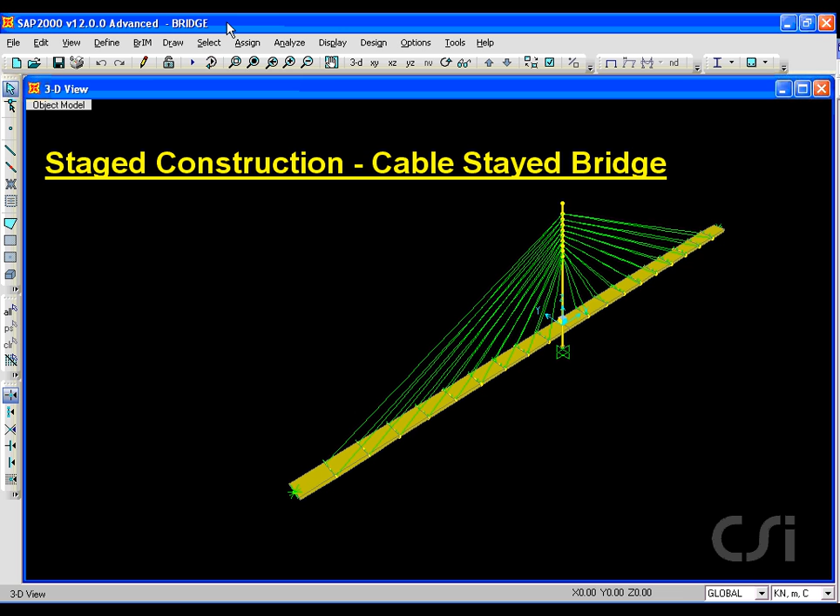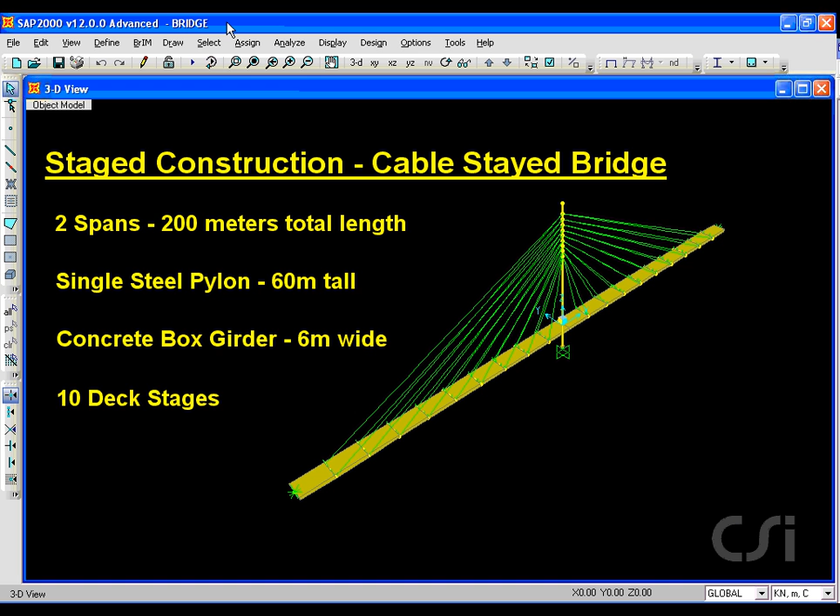This tutorial will show how to use SAP 2000 to model staged construction of a cable-stayed bridge using the Construction Scheduler feature. It will have two spans, each 100 meters in length, with a single steel pylon 60 meters tall. The deck will be a concrete box section, 6 meters wide, and will be constructed in 10 stages.

We start the process by clicking on File, New Model, and selecting the units as kilonewton meters. We will construct the model using only grids, so click on the Grid Only button.

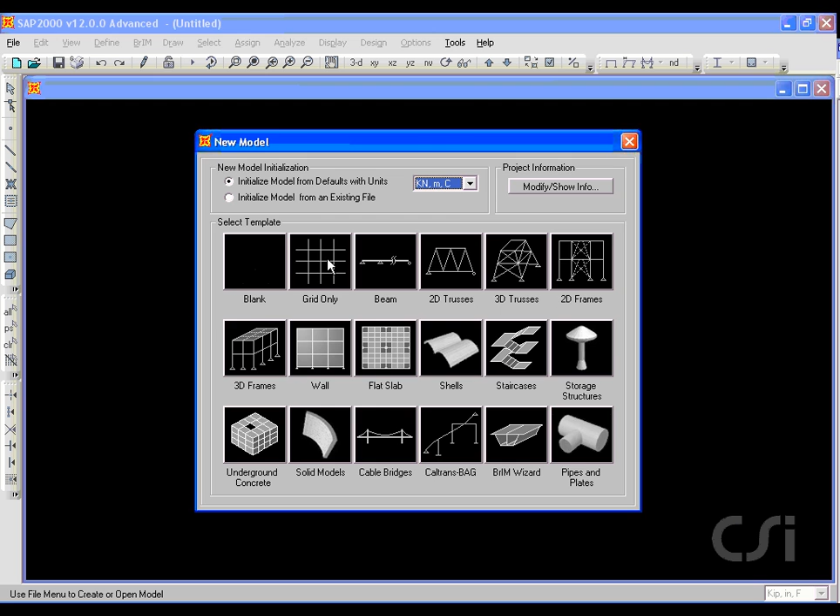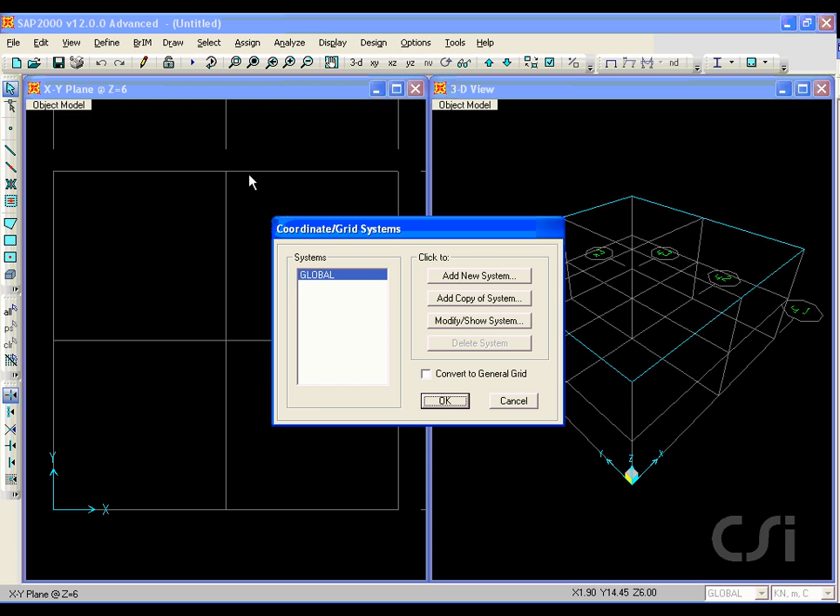We will have a total of 3 grid lines in each direction. Click on the Define Coordinate Systems Grids command, and then the Modify Show button to bring up the Define Grid System data form. For the X direction, which is along the span, our coordinates will be -100, 0, and +100. In the Y direction, which is across the deck width, we will enter -3, 3, and 0. In the Z direction, which is vertical, we enter -10, 0, and 50.

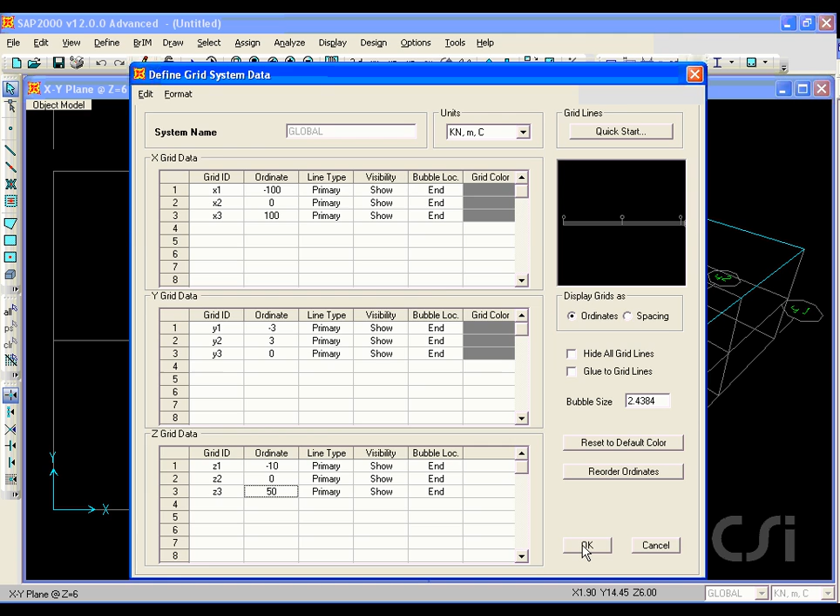We will work in only one window, so close the Plan window and then go to the Define Section Properties Frame Sections command. Here we will add pipe sections to define a non-prismatic pylon. Make sure that the frame section property type is set to steel and click the Pipe button.

We start with the bottom section and enter 1.2 meters for the diameter and 0.05 for the thickness.

We will add another pipe section to model the pylon at the top. Here it has a diameter of 0.6 meters and then again a thickness of 0.05.

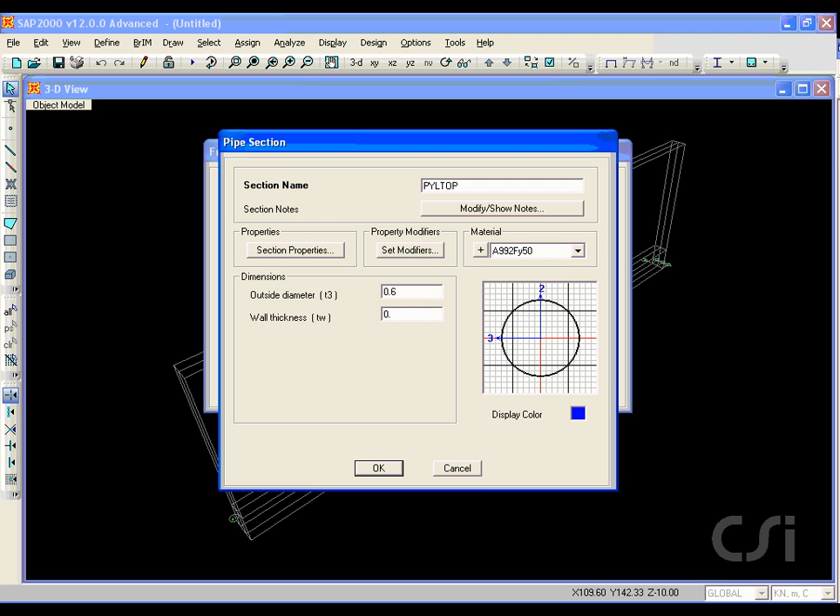Next, we take the previously defined sections and create a non-prismatic section. Select Other from the frame section property type and click the non-prismatic button.

We will call it Pylon, and use the top section as the start section and the bottom section as the end. It will be varied over the entire length in a cubic variation.

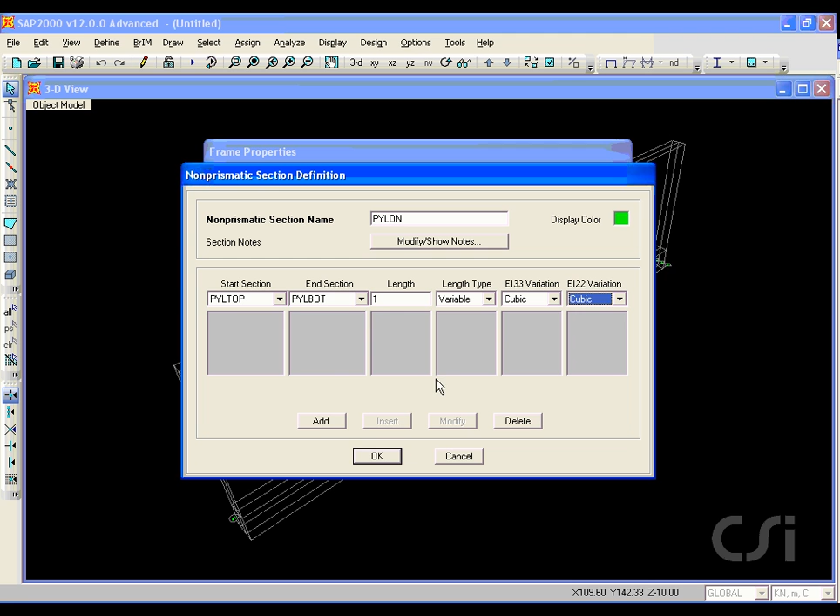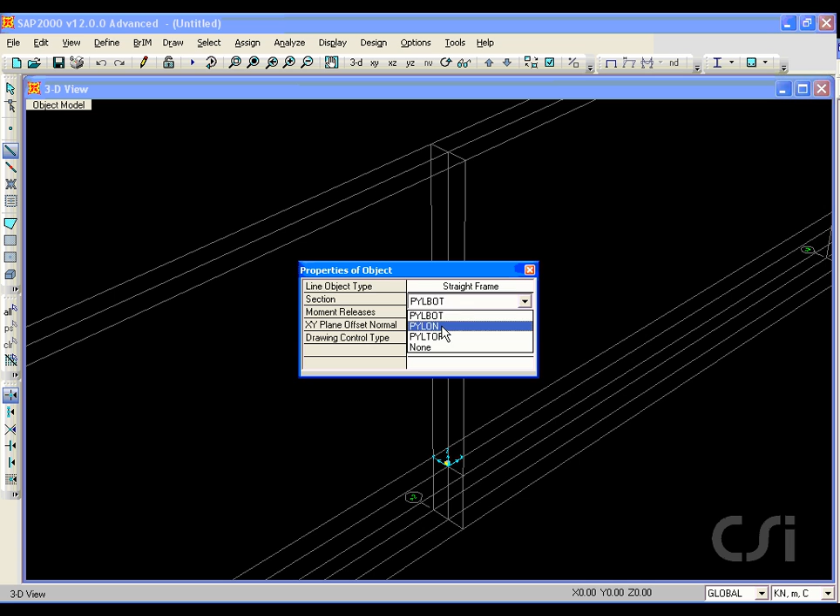Next, we zoom in on the pylon location and draw the pylon object, starting at the top and going to the bottom to match our member definition.

We leave the Draw mode and shut off the grids under the View menu.

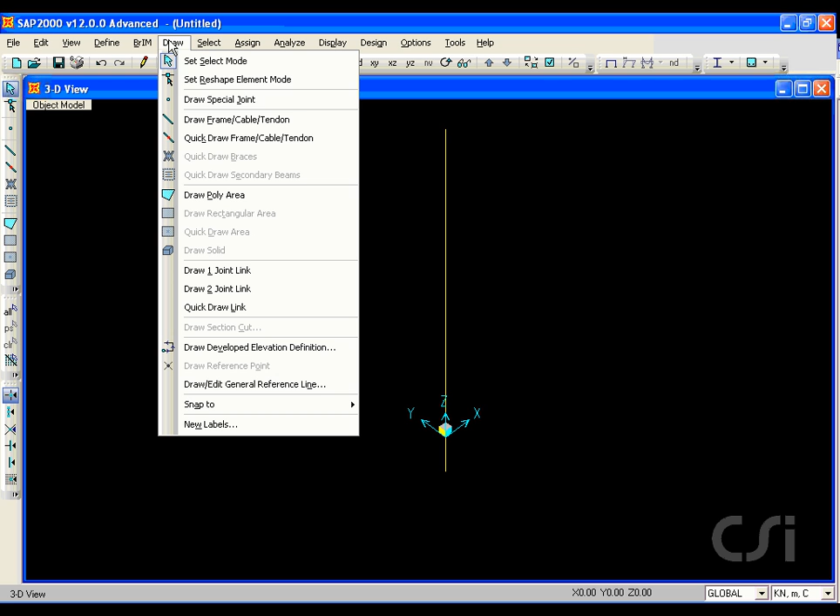Next, we will draw joints to model the saddle locations for the cables. The first joint will be 4 meters below the top of the pylon. By clicking on the top of the pylon with the offset set to -4 meters, a joint is added.

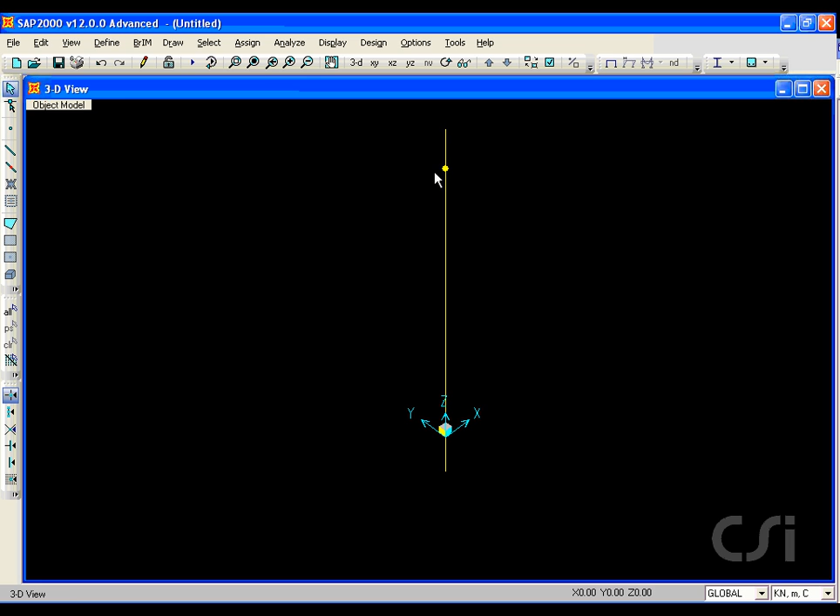We leave the Draw menu, select the joint just drawn, and go to the Edit Replicate command. Here, we will add additional joints for the saddles at 2-meter intervals below the selected joint. This gives us a total of 9 cable to pylon connections.

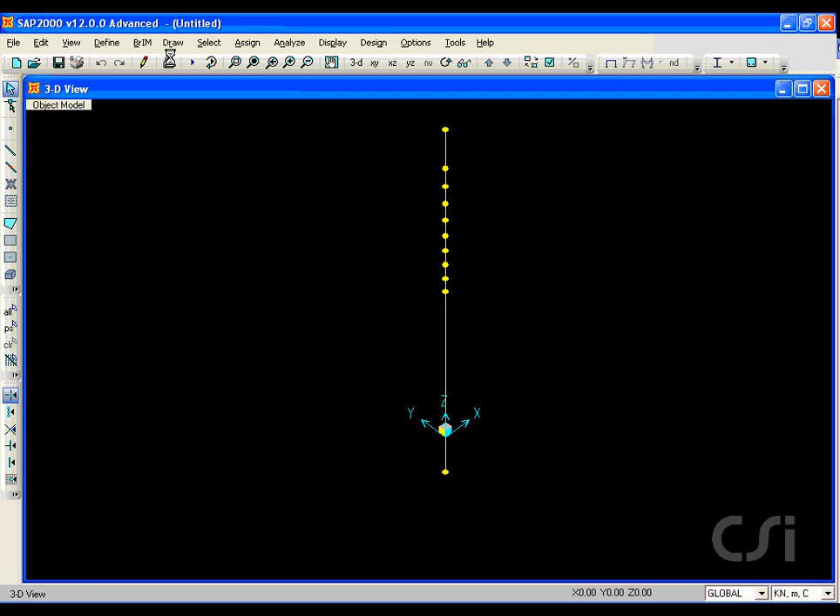Next, we will modify the concrete material property to include time-dependent properties. Make sure that 4000 psi is selected, which is our concrete material, and click the Modify Show button. Check the Switch to Advanced Property display box, and then the Modify Show Material Properties button.

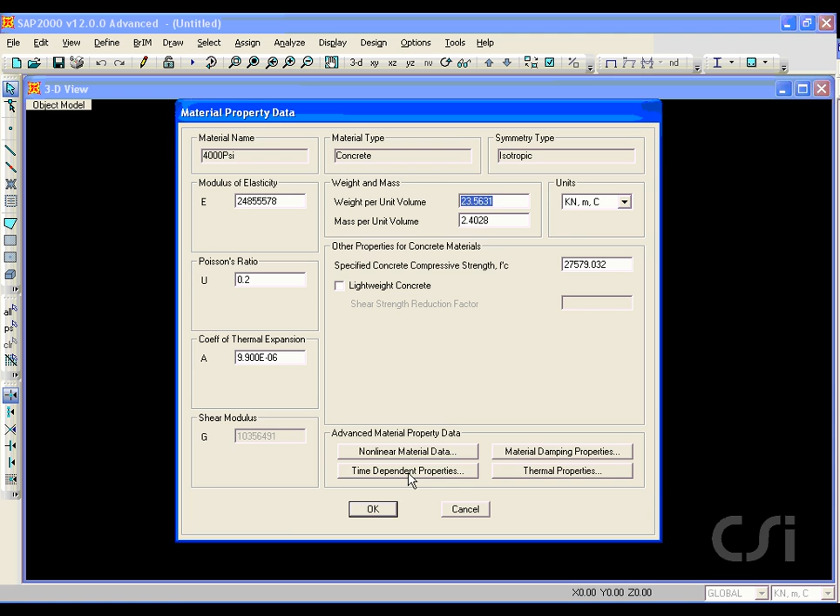Lastly, click the Time-Dependent Properties button. In this model, we will include both creep and shrinkage effects. We will set the shrinkage start age to be 3 days, and we'll use the full integration creep analysis type.

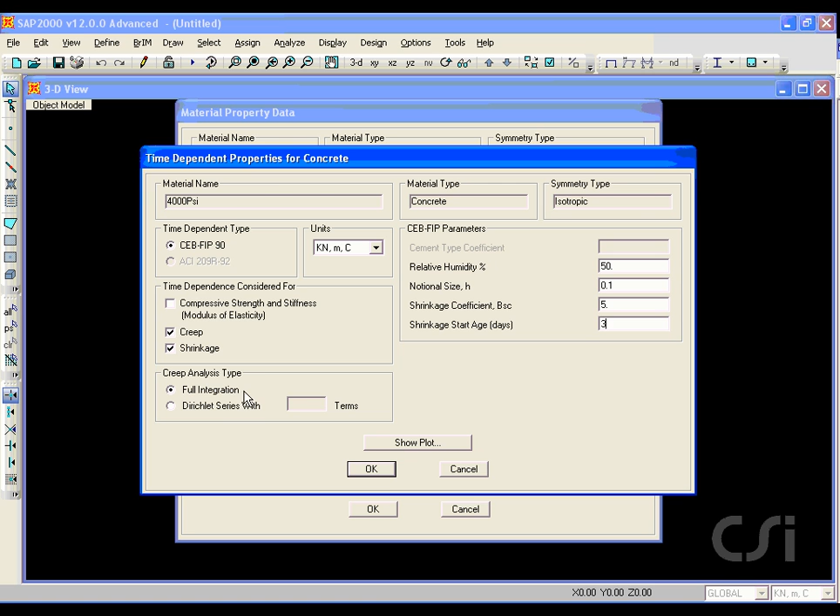Next, we will define the concrete box girder to be used for the deck. Select the material to be concrete and click on the Tube button.

Input a depth of 1.2 meters, a width of 6 meters, a flange thickness of 0.2, and a web thickness of 0.3.

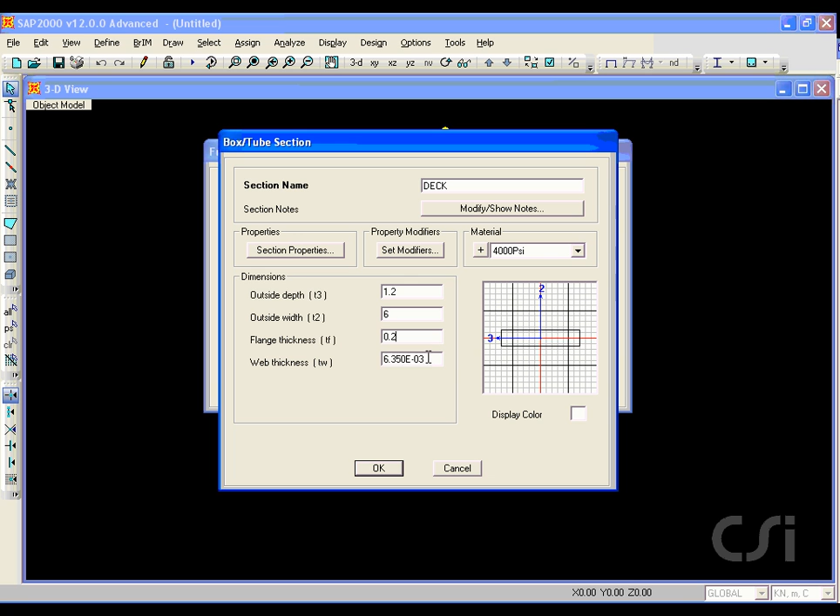Toggle the grids back on and switch to an XY plan view, and toggle down to the Z equals 0 level, which is the elevation of the deck. We will draw the deck as a single object from the pylon out to the right end.

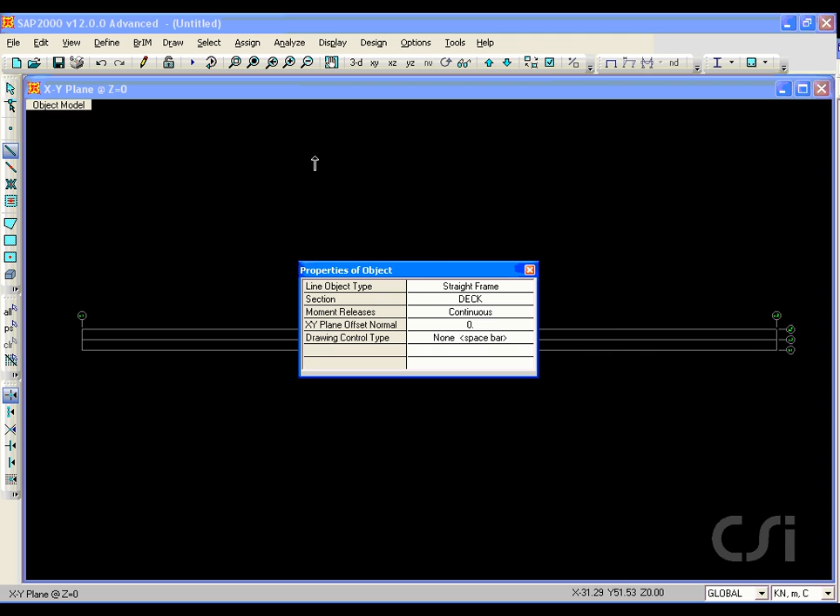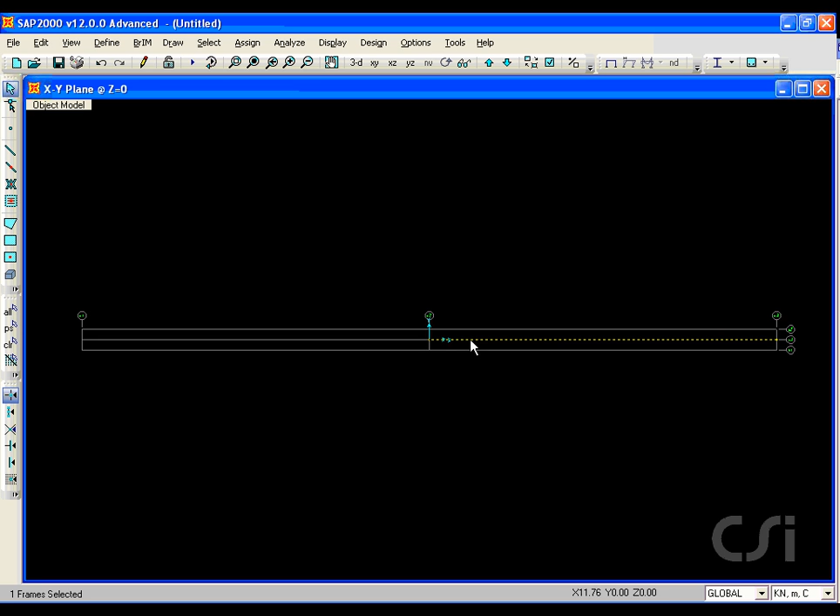Click on the Select Mode button and select the frame object just drawn. Go to the Edit, Edit Lines, Divide Frames command and enter 10 to divide the deck into 10 segments.

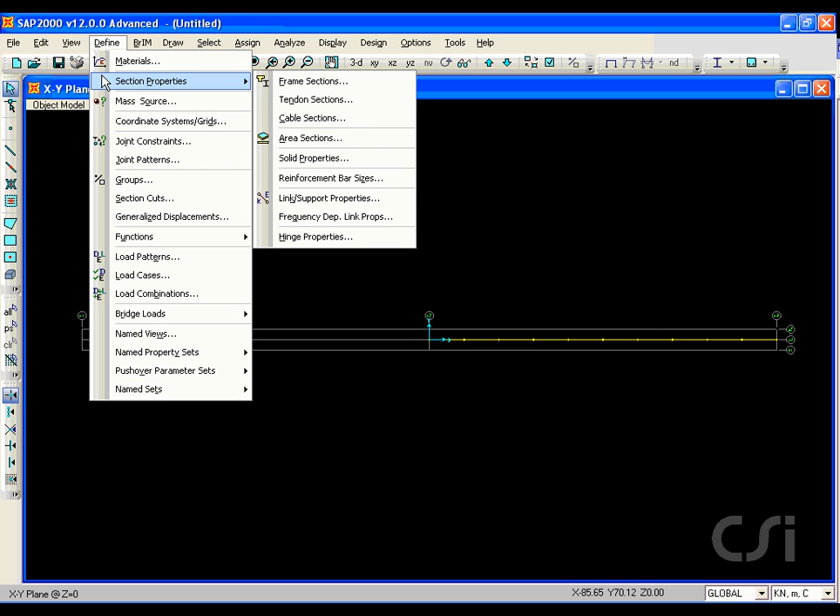Next, we will define rigid links that span from the deck centerline to the deck edge where the cables connect. Click on the Fix All button to restrict any relative deformation.

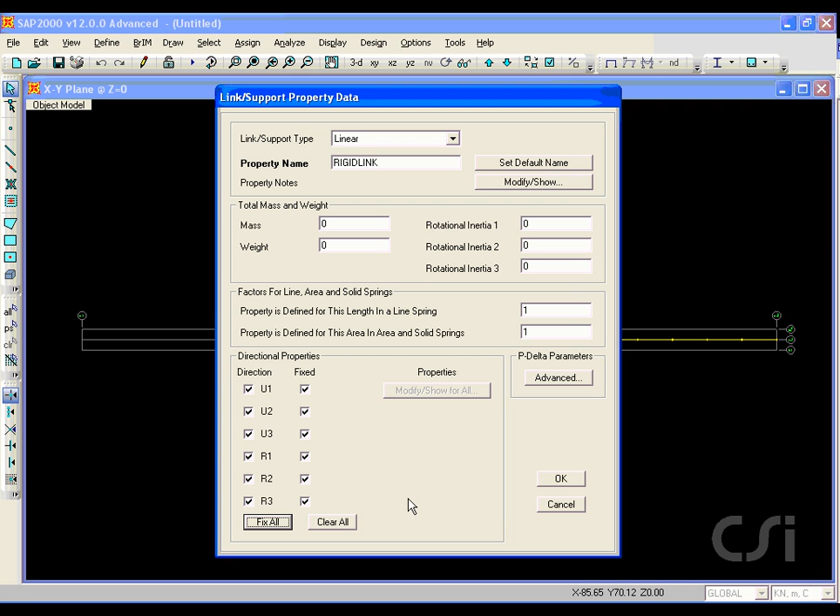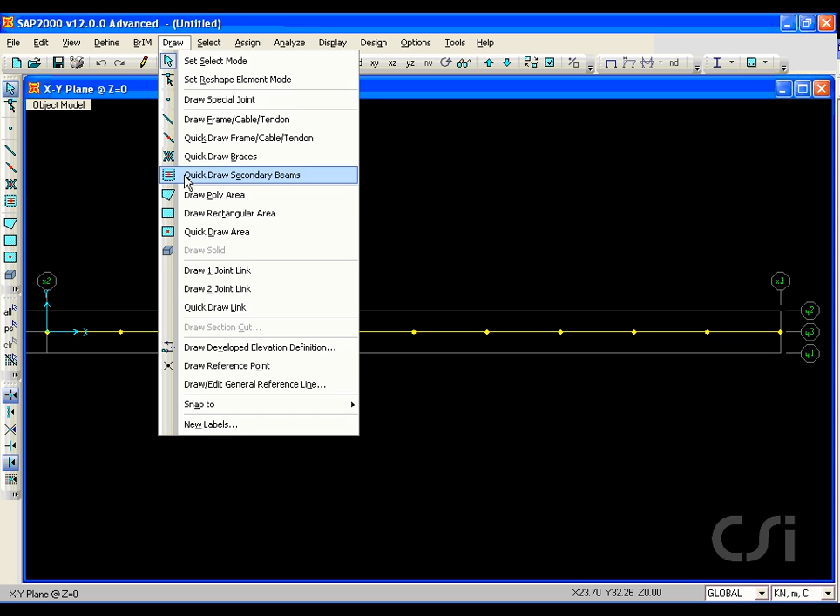Before we draw the links, we will turn on the Snap to Lines option, and we'll window in for a better view. Click on the Draw 2 Joint Link command, and make sure that rigid link is showing in the property box.

Click on the first joint to the right of the origin, select Vertical from the Drawing Control box, and click on the top grid line to draw one link. Right-click the mouse to stop drawing, and repeat the process for the rigid link on the other side of the deck.

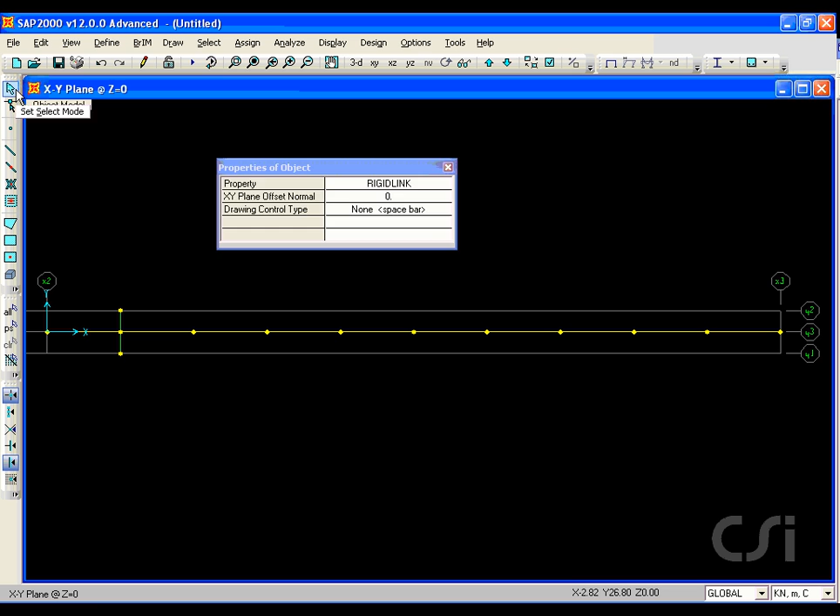Zoom in even closer and select the two rigid links just drawn and go to the Edit Replicate command, and add links at 10 meters on center.

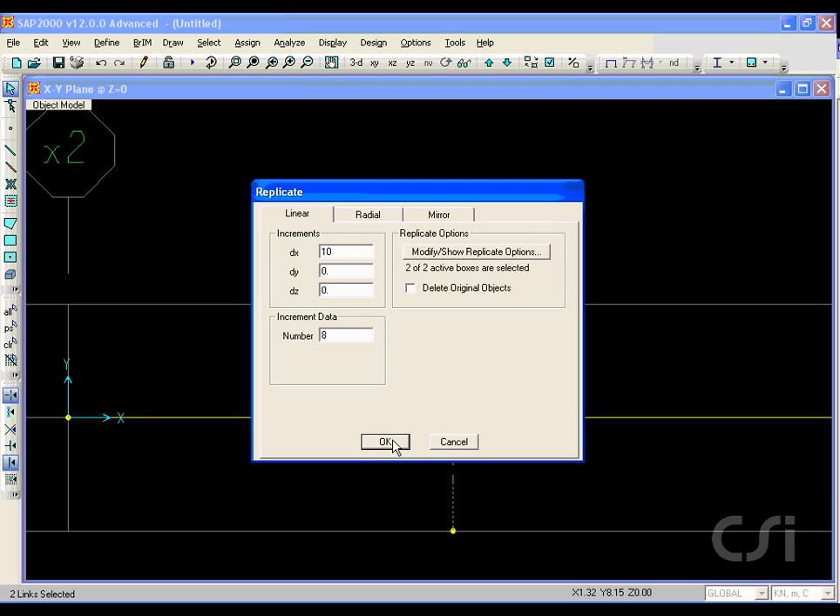Isolating our view on the right side of the bridge.

Next, we will define the cable sections. Go to Define Cable Sections and add a new section. We will define the properties using a diameter of 0.04 meters.

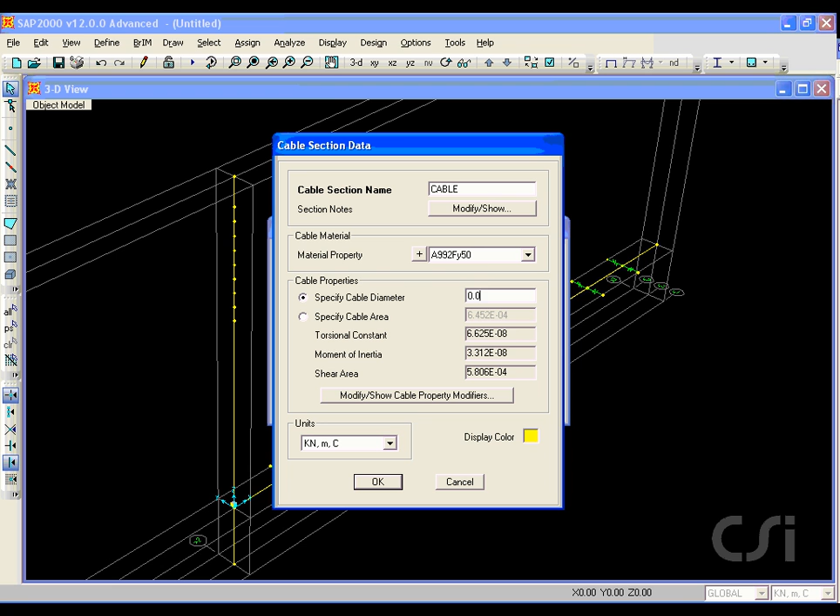Next, we will draw the cable objects. Make sure that the line object type and section are set to cable.

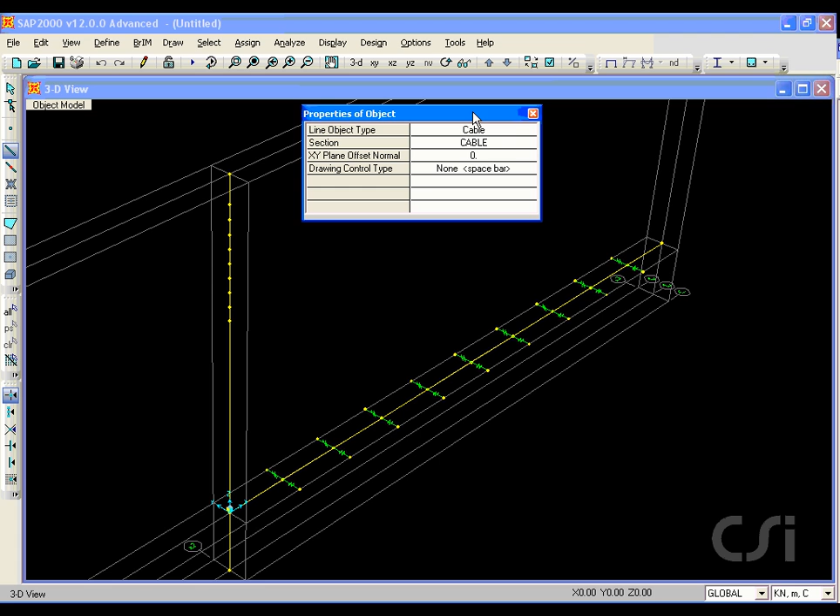Draw the cable from the lowest saddle point to the end of the first bridge segment. The cable geometry form automatically opens. Verify that the number of segments is set to 1, which is typically all we need due to the fact that catenary effects are automatically included in the cable, and make sure that the cable type is set to undeformed, as we want the cables to be taut.

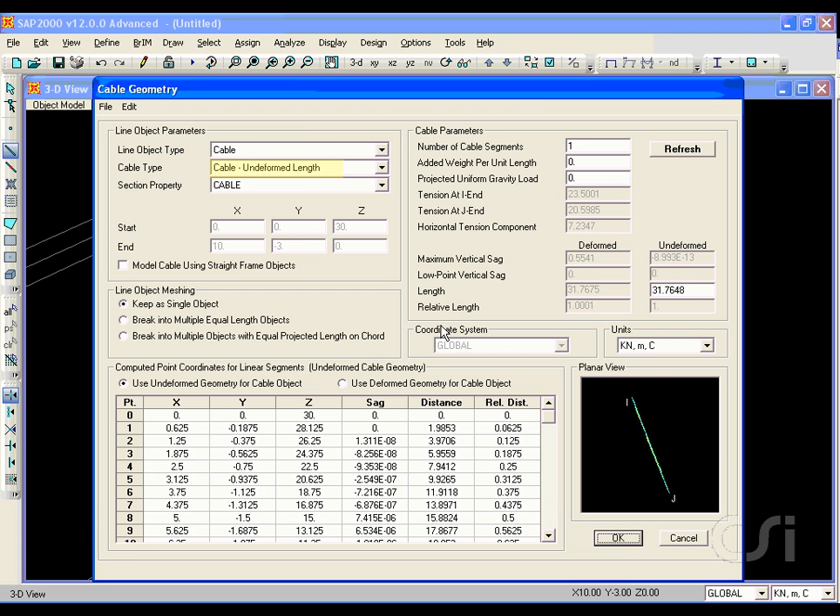Repeat the process for the next cable, going up 1 saddle point and out 1 bridge segment. Continue this drawing until cables have been added all the way out.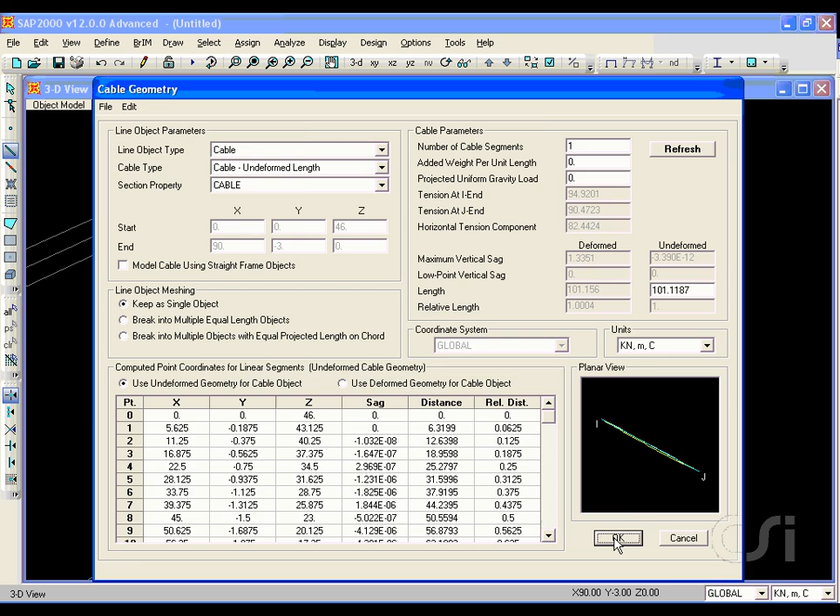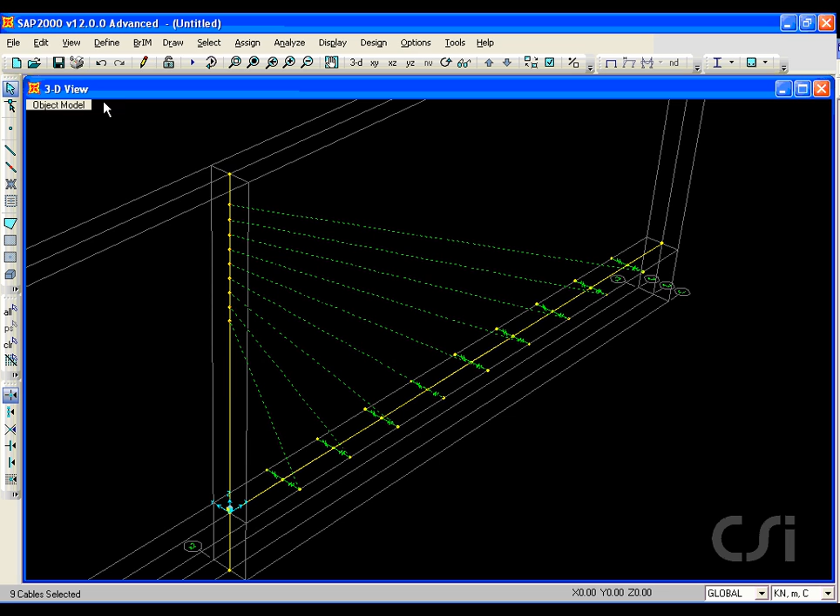Select all the cables using the Select Properties Cable Properties command, and go to the Edit Replicate command.

We will use the Mirror tab and mirror the cables about the plane parallel to X to create cables on the other side of the deck.

Now select the entire model and click on the pylon to unselect it. Again, click on the Edit Replicate command and then the Mirror tab.

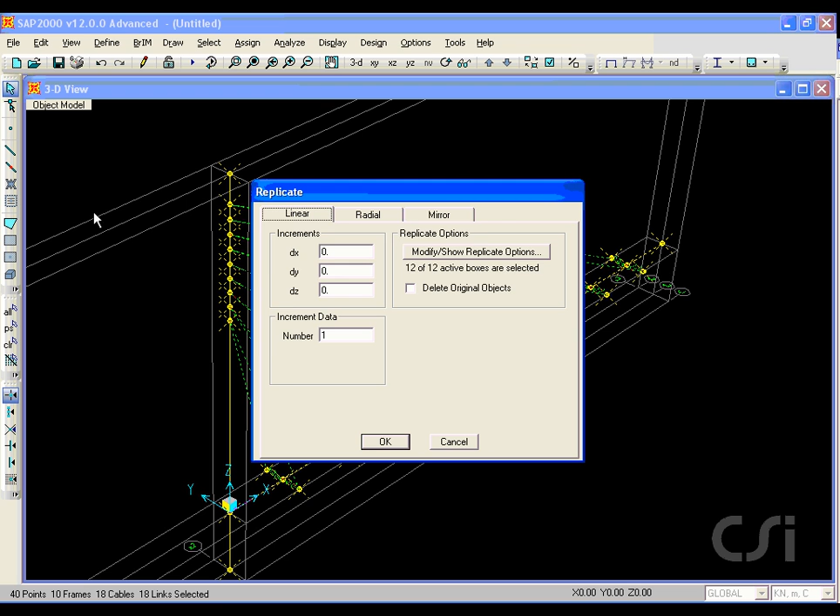But this time, click on the mirror about plane parallel to Y. This will replicate the cables and deck on the left side span.

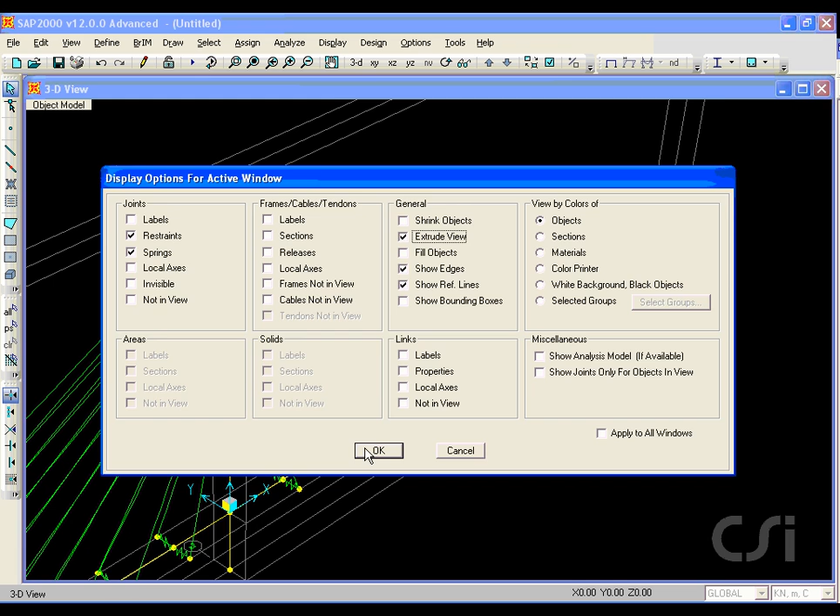To enhance the view, we will select the Extrude View option. And we will also turn off the grid lines and display the model in full 3D.

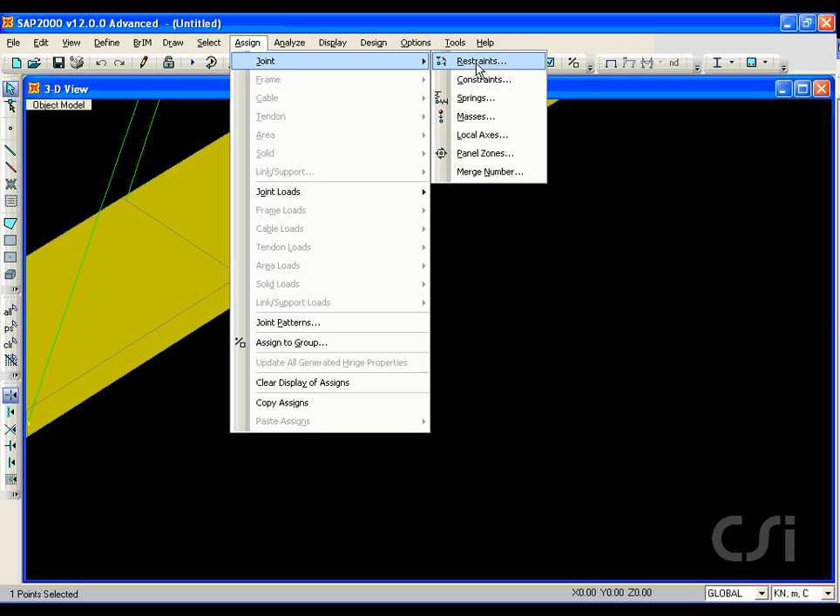Next, zoom into the base of the pylon so that we may assign support restraints. For the pylon, we will fix the base to restrict all translation and rotation.

We will turn off the extruded view so that it will be easier to select objects.

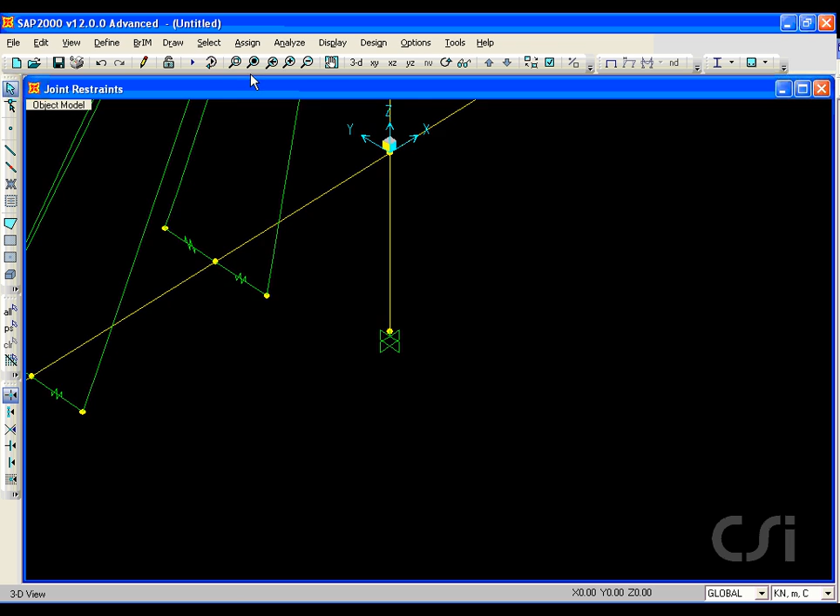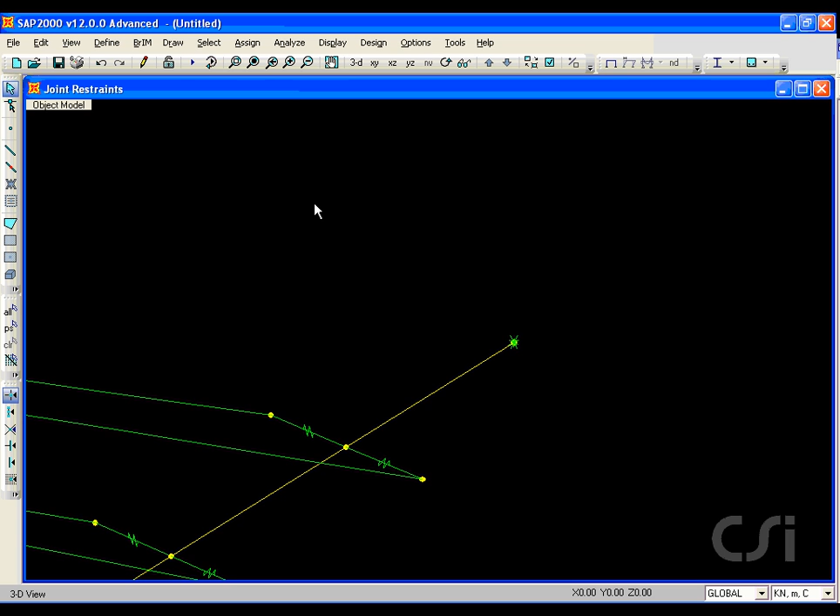Next, we will select the right end of the bridge and assign a roller support. We will assign the same roller support to the left end as well.

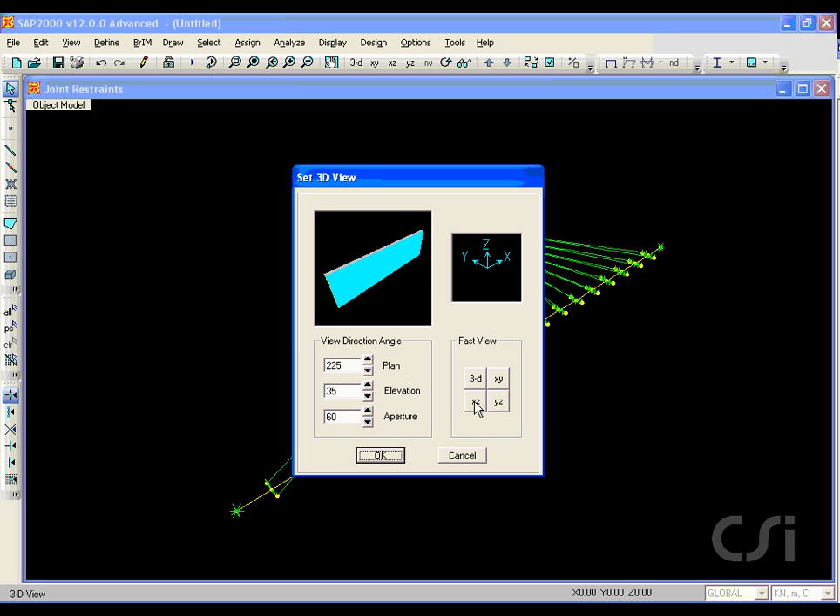Next, we will assign objects to groups that will be needed to define the stage construction. Start by switching the view to a XZ plane and selecting the pylon.

Go to the Assign to Group command and add a new group called Pylon.

Next, select the deck segments just to the right and left sides of the pylon, along with the accompanying cables. There will be 4 cables in all, and assign them to a group called Deck 1.

This will be the first deck construction stage. Repeat this procedure for the next group of decks and cables.

And continue until all deck sections have been assigned to a group, finishing up with group Deck 10 that consists of just deck.

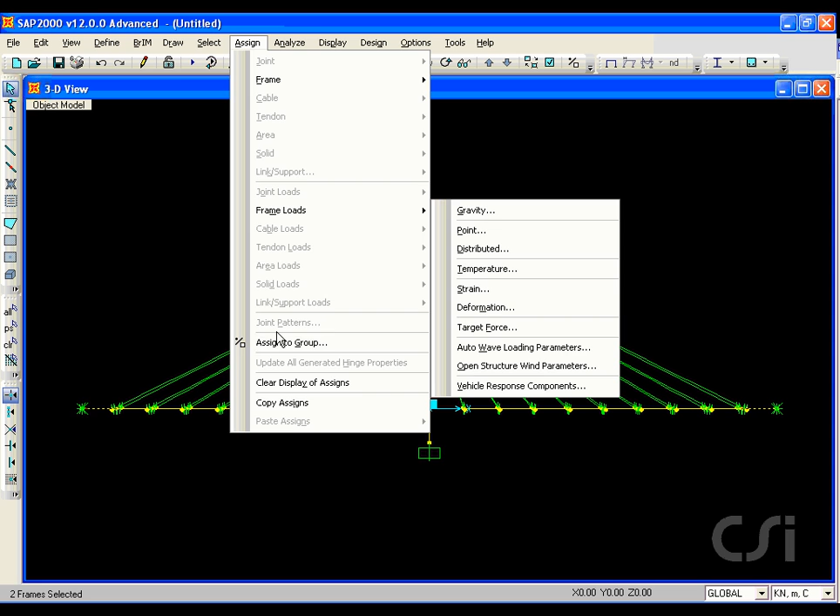The next step is to define the sequence of construction, which is where we will identify the tasks using the construction scheduler found under the BrIM menu.

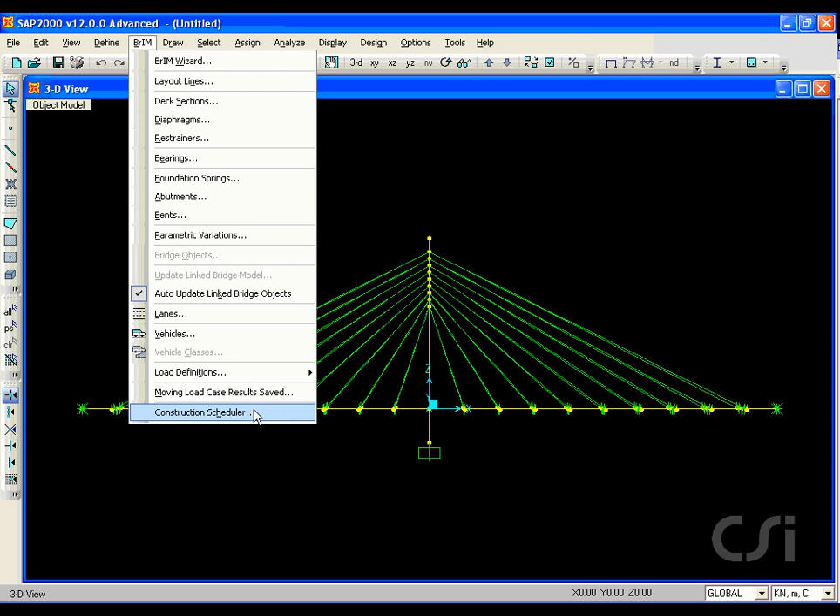Items input here will be converted into stages and cases under the Load Cases command. Stages may involve changes in the structure, application of load, and/or elapsed time during which creep, shrinkage, and material aging may occur. First, the model is saved.

Next, click the Add New Schedule button and click OK for the default schedule name.

We start by entering Superstructure as our first task description. This will be a summary task that will be used to group all the tasks associated with building the superstructure.

The next task will be Pylon with a duration of 7 days. It has no predecessor task, and we click the Define Operations toolbar button to display the operations form.

Select Add Structure for the operation, select Pylon for the group, and use 0 days for the age at add since the material is steel.

In addition to the structure being added, check the Include Object Self-Weight checkbox and load this group with a load equal to twice the dead load.

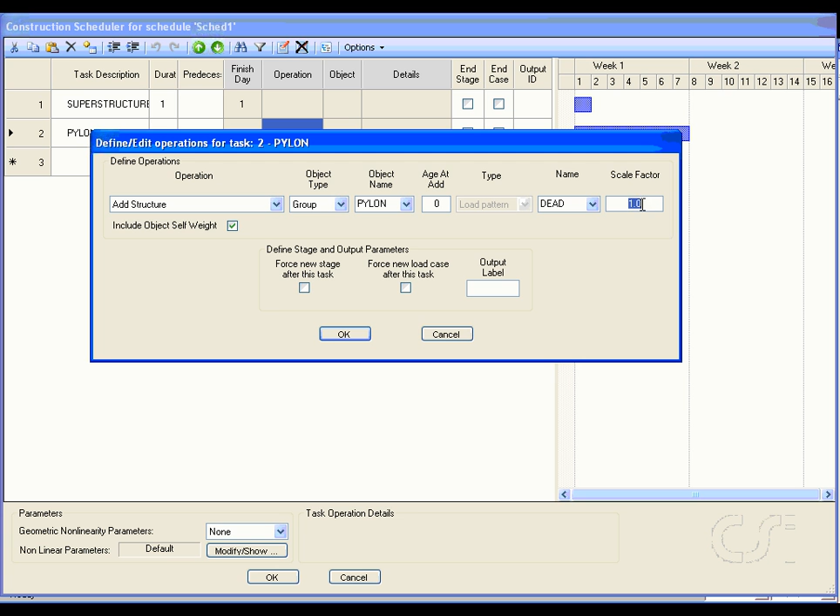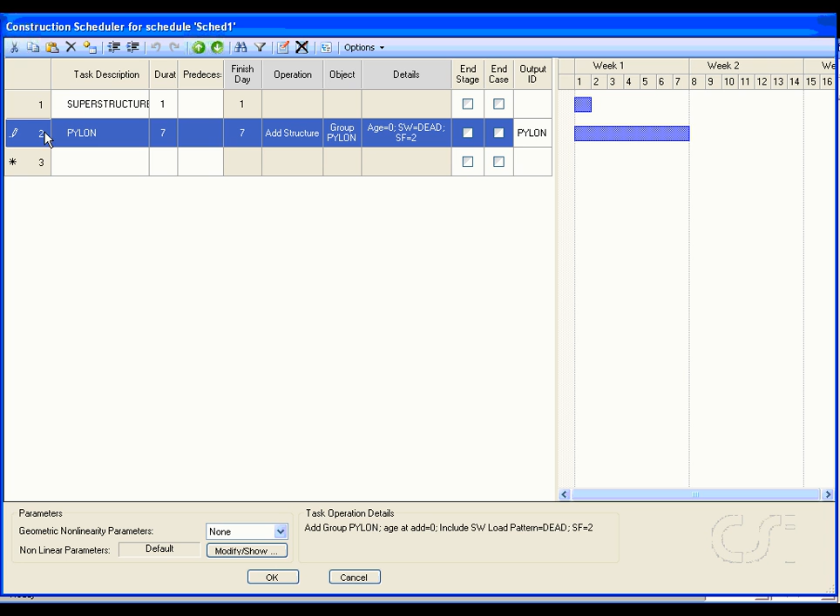On the schedule, notice that the columns have been populated with the operation, object, and details including age, self-weight, and scale factor. Lastly, for this task, we will specify an output ID, also called Pylon. Select this task and click the Increase Indent toolbar button to identify this task as a subtask of superstructure.

Now we will add another task, this time for the first deck stage. Named Deck 1, it will have a duration of 3 days and will have a predecessor of Task 2, which means that it will not start until the completion of Task 2. This conditional relationship will be shown on the Gantt chart.

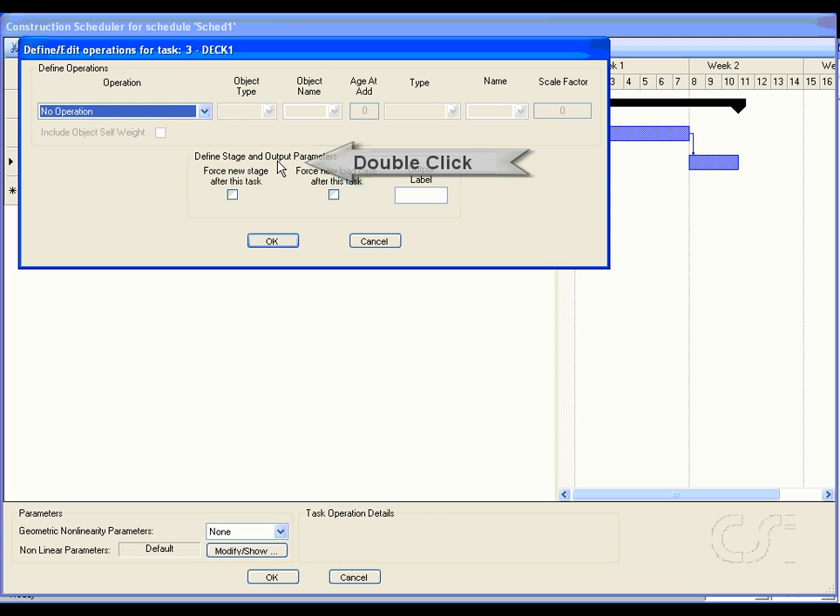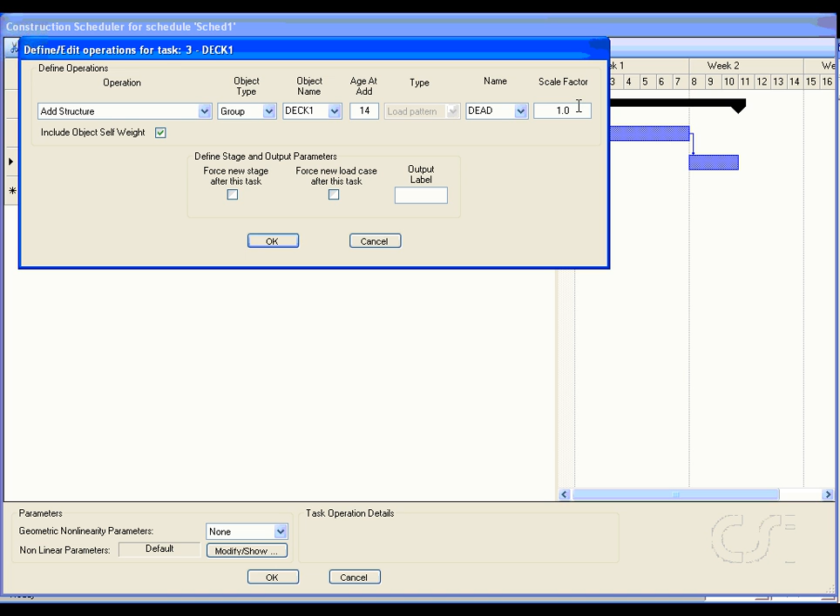Double-click on the Operations cell to bring up the operations form, and again we add structure, this time the group Deck 1, with an age at add of 14 days. Self-weight is checked with a dead load scale factor of 2. We specify Deck 1 for the output ID.

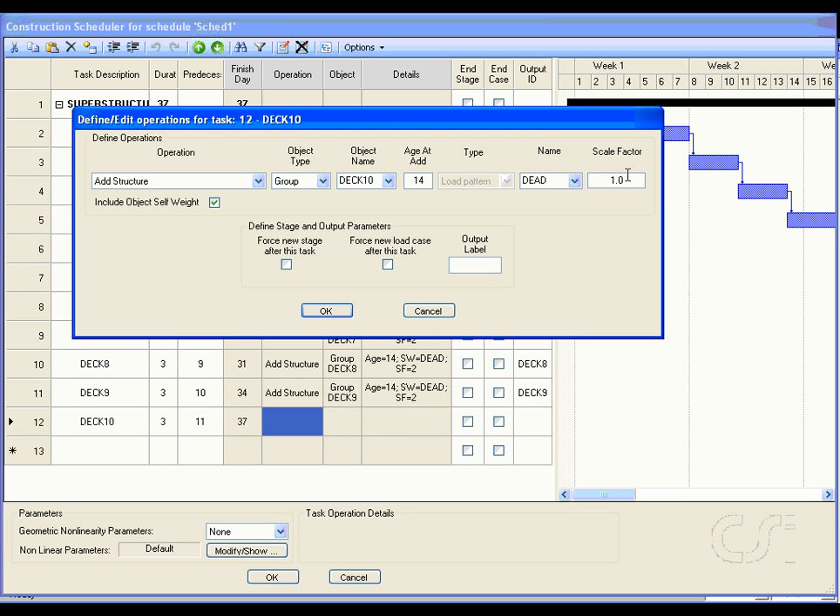Repeat this process until you have created tasks for all of the deck groups. Scrolling out, we can see how the tasks relate to one another on the Gantt chart.

Next, we will add tasks after the construction to model the effects of time. We will input a task summary called post-build, and then a task called Time 1 with a duration of 3 days, a predecessor of task 12, but no operations. This task is only meant to mark the passage of time. No structure is added or loaded.

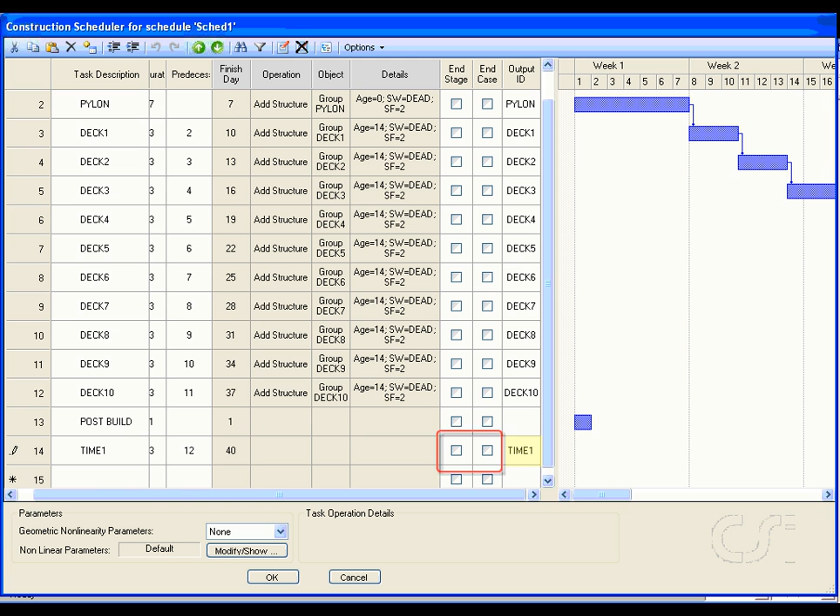However, it is important to specify an output ID, for if the task contains no operations and the end stage and end case checkboxes are not marked, the program will ignore the task unless the output ID is specified. Continue to add time tasks, with the last task having a duration of 3,000 days. Older concrete is less sensitive to time and thus may have a longer duration step.

It is important to realize that task duration can have a significant impact on creep calculations. Select the post-build task and click on the Decrease Indent button to identify this task as a summary task. Again, we can see the relationship between tasks, including summary tasks and subtasks.

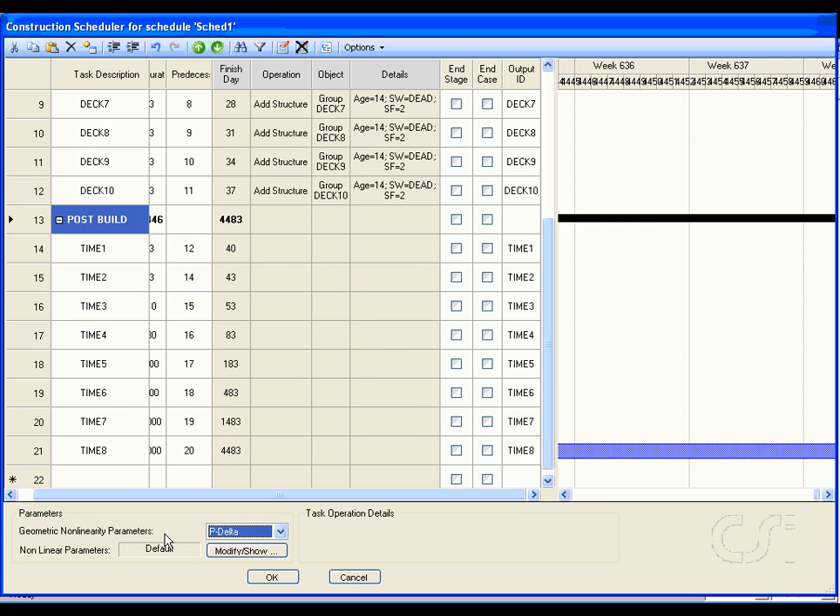Before we leave the construction scheduler, select P-delta from the Geometric Nonlinearity Parameters drop-down list to include P-delta effects in the pylon and deck, and click the Modify Show button for nonlinear parameters. Make sure that the Time-Dependent Material Properties option is checked, so that creep and shrinkage effects are included for the concrete material. We are now ready to leave the construction scheduler.

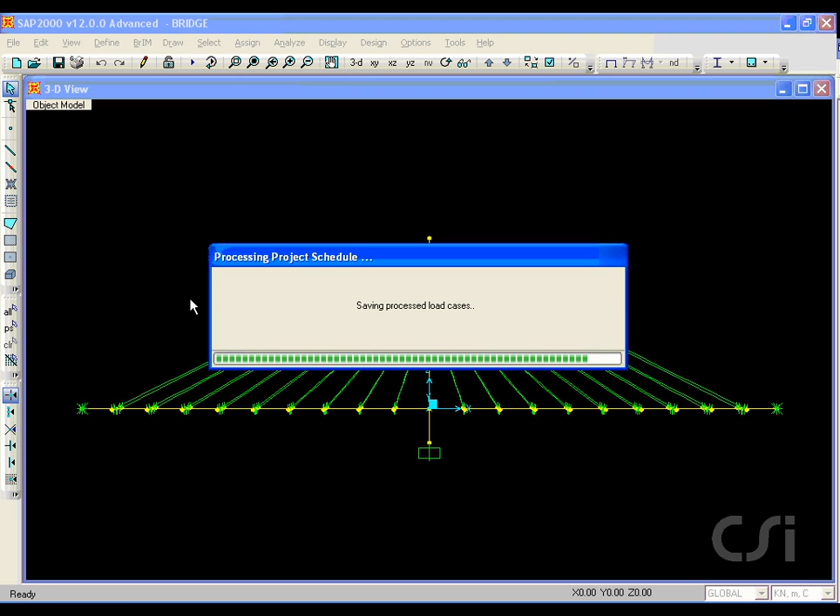As we exit, the scheduler generates the stages and load cases for the nonlinear static analysis. Click the Define Load Cases command, and we see that a Sched1-ZERO load case has been created from the construction scheduler input.

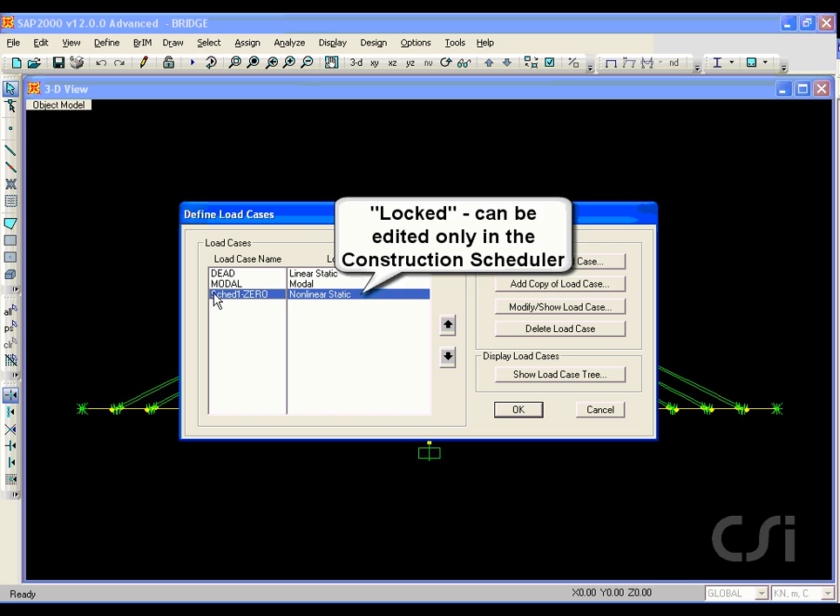This load case is locked, meaning that no changes may be made to it using the Modify Load Case button. Changes can only be made in the scheduler. On occasion, however, we may want to make some changes directly to the load case, in which case we first need to make a copy and then edit the copy.

Name our copy case Bridge, and note that the stage construction load cases are a type of nonlinear static analysis. Also note that the P-delta has been selected as done on the scheduler.

The construction scheduler typically creates 2 stages for each task, a duration stage with no operations and a 0 duration task at the finish day where operations are carried out.

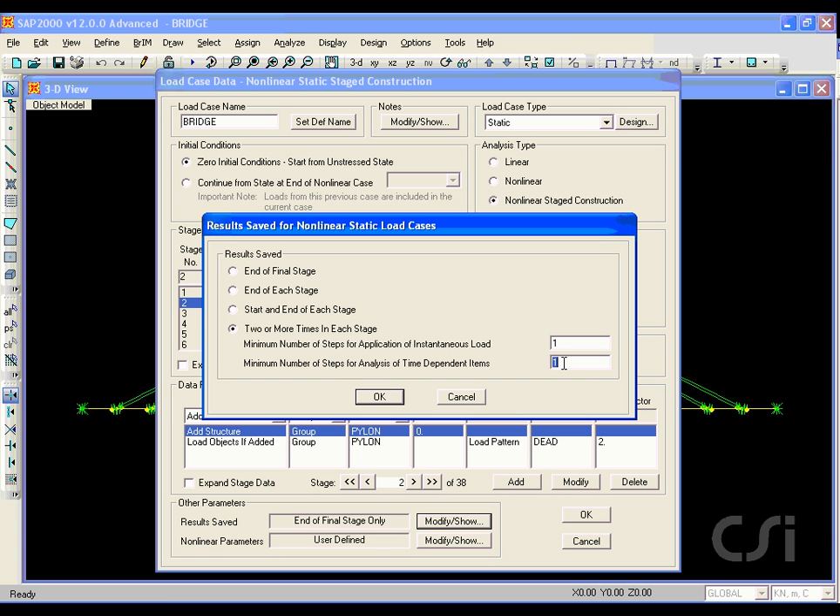Click on the Modify Show button for results saved, and make sure that there are adequate number of steps assigned for the time-dependent items. We will use 5 for this model.

Now we are ready to run the analysis. For this model, we will not run the dead, modal, or Sched 1 cases. Only the copied bridge case for the static nonlinear stage construction analysis.

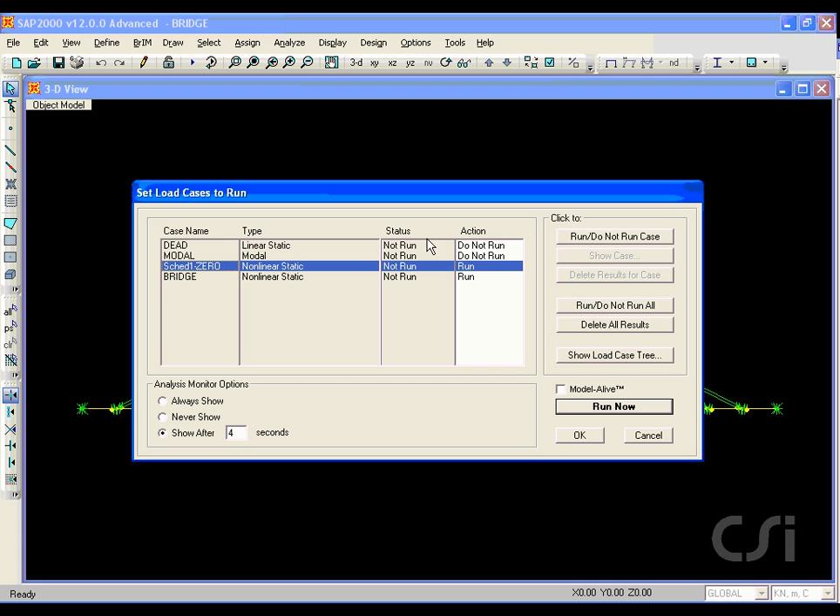The analysis window shows how the program steps through each stage.

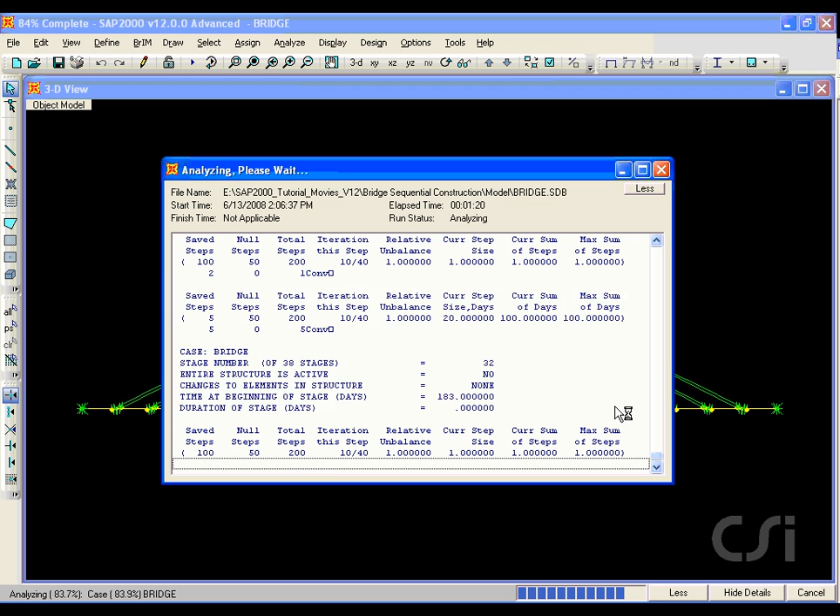Once the analysis is complete, we will display the moment diagram in the deck for a particular step. For the step we selected, step 60, the bridge is only partially complete.

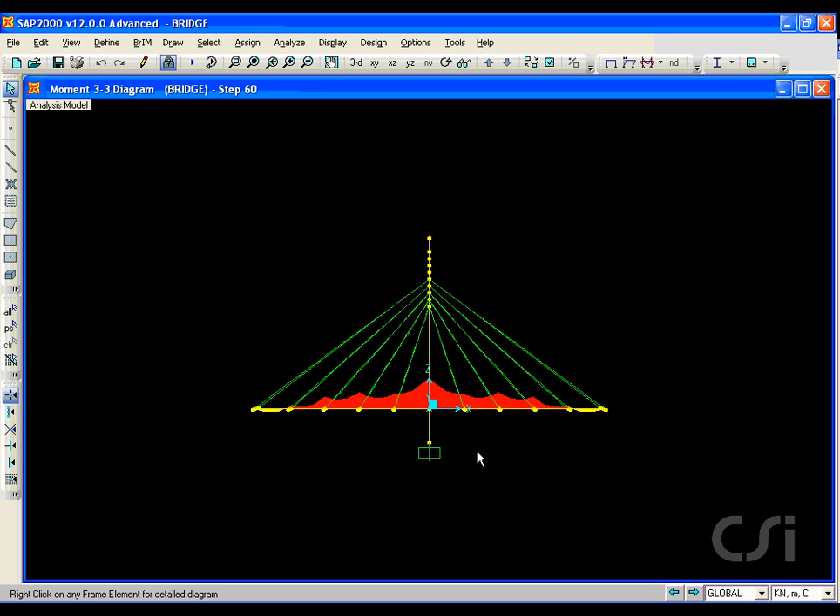We can create a video showing the sequence of bridge construction along with the varying moments in the deck, including both construction and time effects.

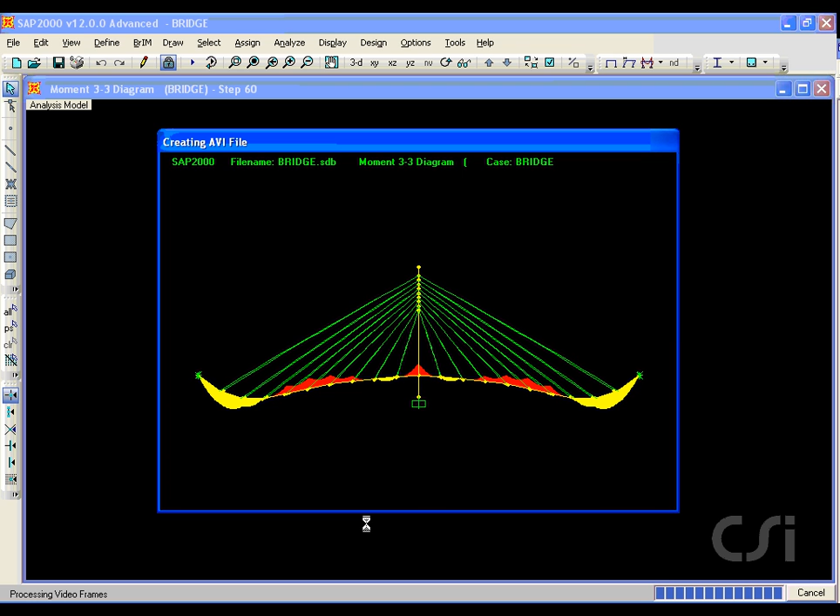Next, display the undeformed shape.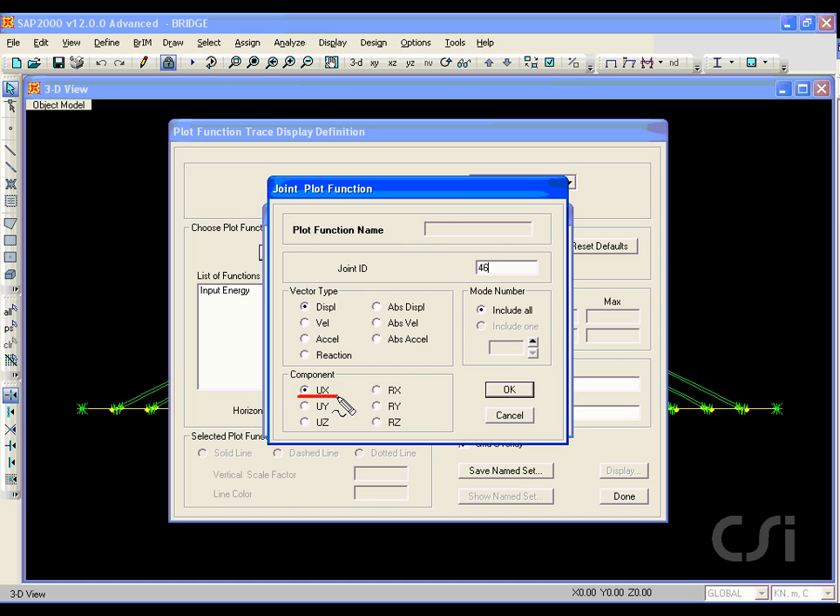Next, we will display the longitudinal deflection of the deck mid-span versus time. The point selected is joint 46. And we will limit the horizontal time axis to 300 days.

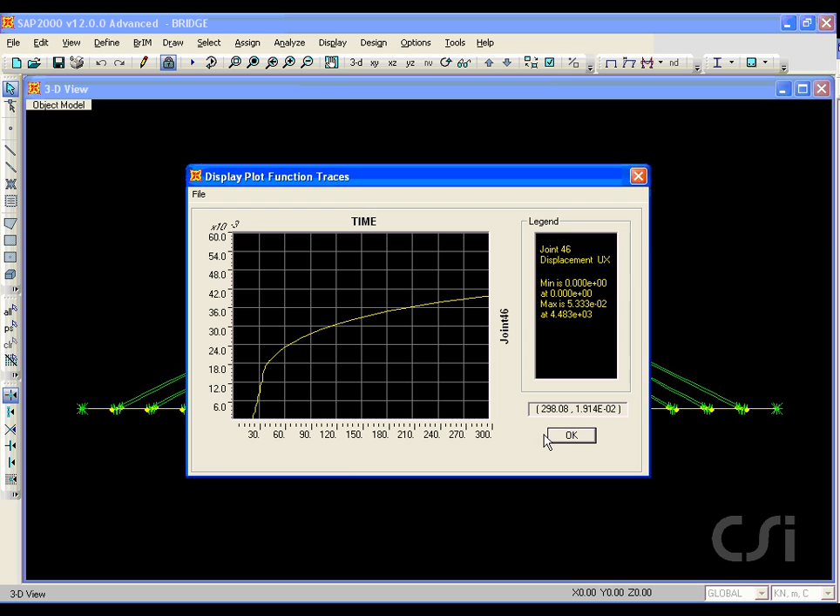Next, we will plot the axial force in 3 cables as it varies with time. This time, we will limit the time axis to 45 days. It is easy to see the 3 distinct starting times for the 3 cables.

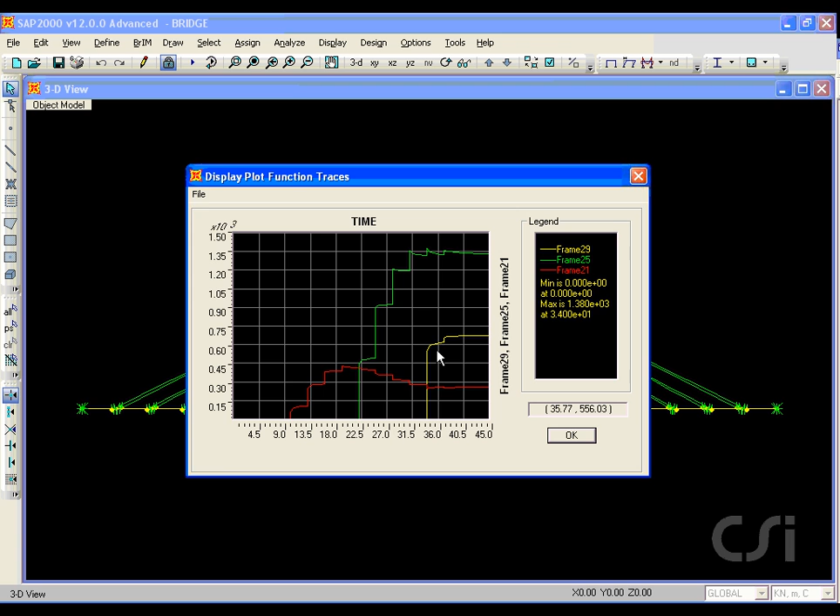Lastly, we will plot the moment mid-span as it varies with time.

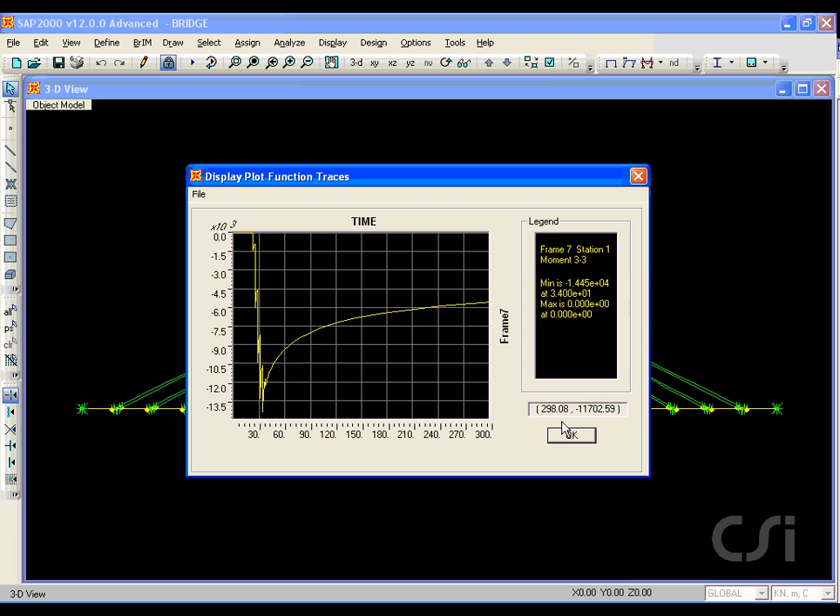This concludes this tutorial.